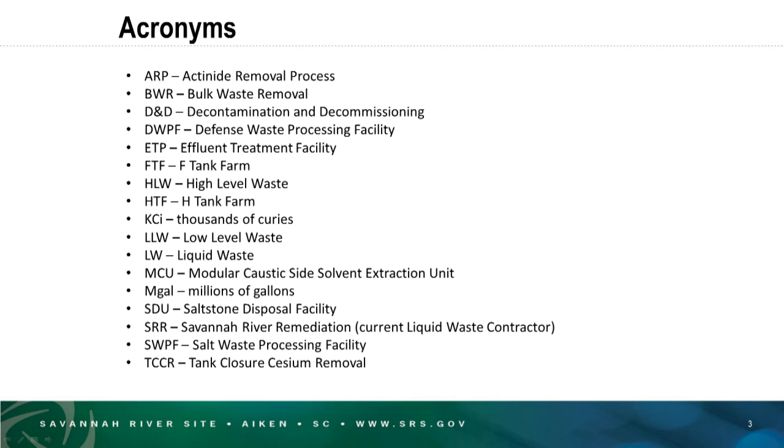So we are going to be presenting to you the topic that we promised you, the Waste Management Committee, the liquid waste system plan, but it also will help you with the tank closure discussion that you're going to get after this one, and also the status of liquid waste facilities that you will be getting throughout the year. The list of acronyms, because that's our favorite language here. So basically, we're going to be talking about the liquid waste overview, then the system planning process, the inputs to the system plan revision 21, and the results.

So let's go to the chicken or the egg. So why do we need a liquid waste program? Back in the 50s, the reactors on site were irradiating targets and fuels, and then the separations operations, which is the nuclear materials program, operated for many years. They produced a total of about 160 million gallons of waste. That's the waste that we call legacy waste nowadays, and that's the waste that we're storing right now in our storage tanks. Obviously, we do not have 160 million gallons of waste right now. We only have about 35 million gallons.

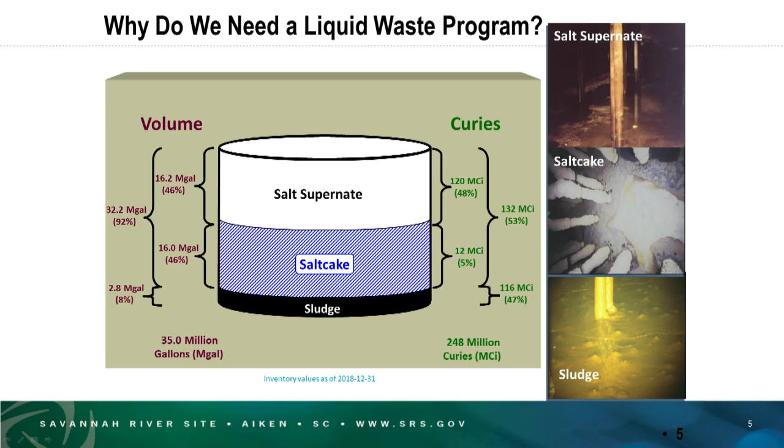How did that happen? Well, the Department of Energy, and back then whatever it was called, constructed storage tanks and realized that we just couldn't build that many tanks to store all that waste. So the waste got evaporated over the years and concentrated, and that's how we ended up with about 35 million. Oh, I did the wrong thing. Okay, so that's why we ended up with 35 million gallons.

Basically, when the canyons, H Canyon and F Canyon, were processing the targets and the fuels, they were extracting nuclear materials that are used for different things in the medical field, the space program, and defense. And that waste, when it was sent to the tank farms, was combined with sodium nitrite and sodium hydroxide, so it would become an alkaline waste, because it was produced from an acid process. And when that happened, what we ended up with is a salt waste and sludge waste.

Basically, the waste that was being produced by the canyons had a lot of metal oxides, like aluminum, iron, uranium, mercury, nickel, and noble metals. And most of those are insoluble. So that's how we end up with the sludge. And as you see, the sludge is pretty thick. Some people say it looks like peanut butter. I don't know why we always compare it to food, but it's like peanut butter.

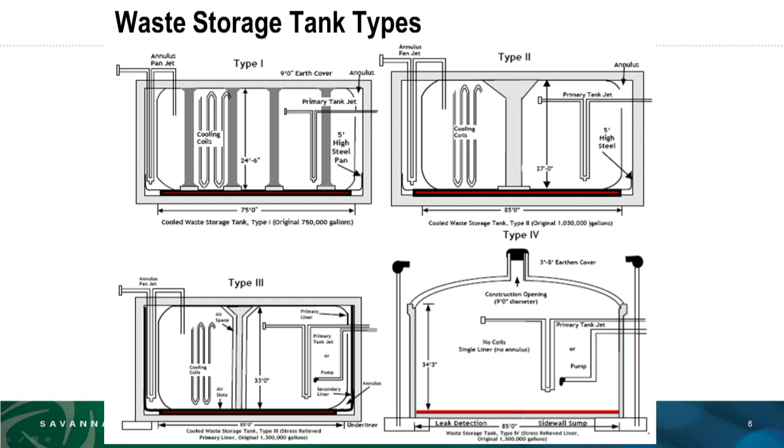The tanks on site were built at ground level, and then they put dirt all around them and built what we call hills, the east hill, the new hill. The dirt was built up around them for the shielding. And as you see, we built them since the 50s, and the new ones were finished in the 80s.

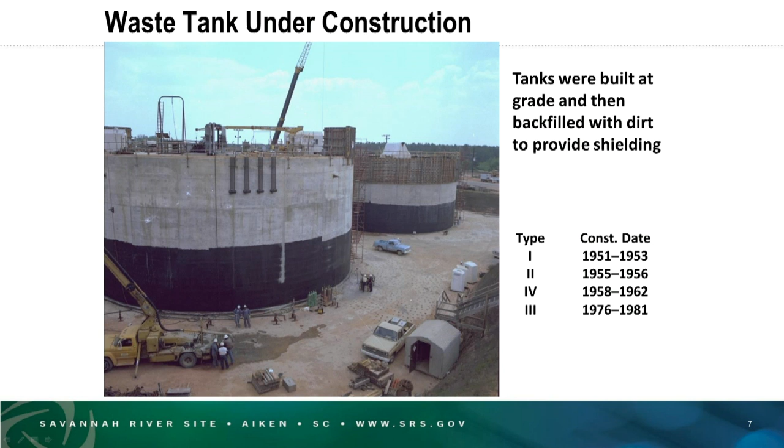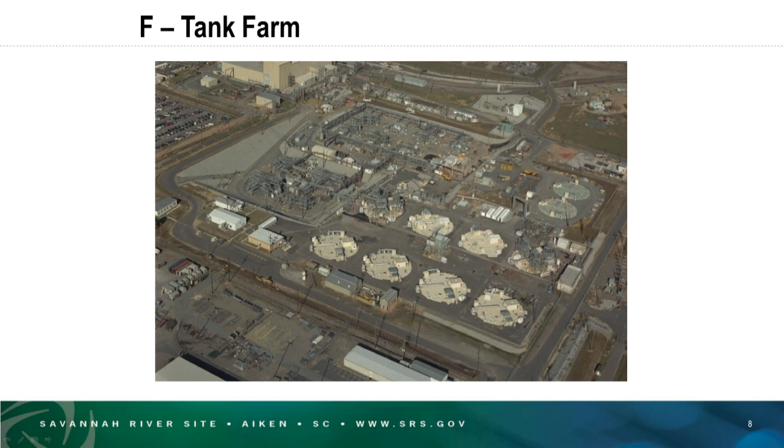F-tank farm, just to give you a glimpse of what we mean when we say a tank farm. This is F-tank farm. Basically we have a group of tanks in an area. You only see the tank tops in the tank farm. I have worked on every tank. Just to give you a perspective, when you came to the tour, I think you came only to the DWPF. Hopefully in the next tour you'll get to see some of this.

What we're talking about here is that we got two tank farms, F-tank farm and H-tank farm. And there's an inter-area line between them, 2.2 miles long, through which, by pumping, we send waste from one to the other. And the treatment and disposal facilities are around H-tank farm, really. F-tank farm right now we are using more for storage. H-tank farm is really where all the action happens, preparing feed, etc. for the facilities. You got SWPF over here and DWPF, Saltstone, ETP, Effluent Treatment Project.

And we got one evaporator in F-tank farm, 2 evaporators in H-tank farm. The one evaporator in F-tank farm, we're not operating it anymore. We have 2 in H-tank farm that are still operating, and you have heard updates on them every now and then. We got 22 tanks in F-tank farm, 29 in H-tank farm. 24 are older style tanks. 27 are new tanks.

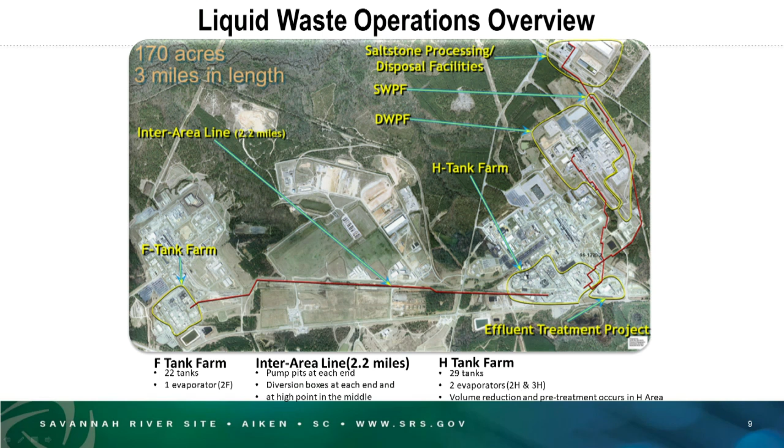So you might have seen this before. Just to give you an idea, we have received the waste, and we continue receiving a very small amount from H Canyon at this point. We have 43 tanks active, 8 tanks have already been operationally closed. Our salt waste right now goes through ARP/MCU, which will be ending soon.

SWPF coming up in the next year. And the tank closure cesium removal process, which is in demonstration at this point, and you'll get to hear about it after this talk. The highly radioactive component of the salt waste goes to the DWPF, Defense Waste Processing Facility, which is vitrified, stabilized, immobilized into canisters that are being temporarily stored on site until we can send them some safe place.

And then the rest of the volume, which is the grand majority of the volume, goes to Saltstone, where it's gonna be grouted and made a solid as a saltstone, and that's a permanent disposal into the Saltstone disposal units. When we remove all the waste, we proceed with tank closure as funding is available. Any questions so far? All right.

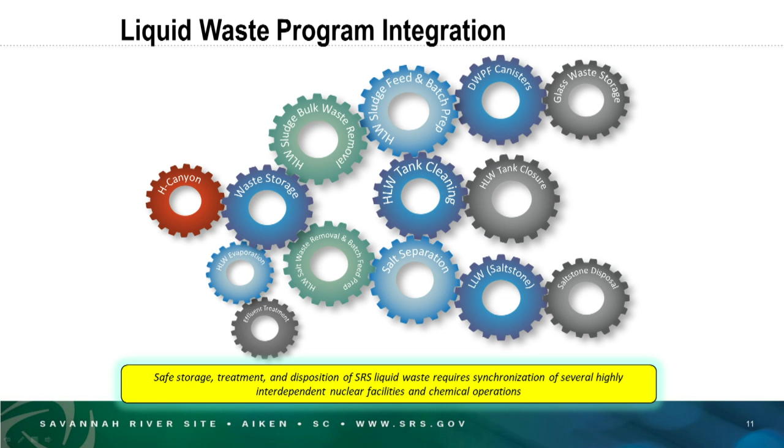Okay, let's see. Waste retrieval, just really quick: 35 million gallons, and 92% of it is salt. When we want to remove salt waste, you saw that salt cake is a little bit solidified, and then the supernate. For every gallon of salt waste, we need about 3 or more gallons of water to be able to dissolve it. So from one tank, more than 3 times is produced in terms of salt solution, and sometimes we say that we're unzipping the salt cake, because it's compact, and we're making it what it was to begin with.

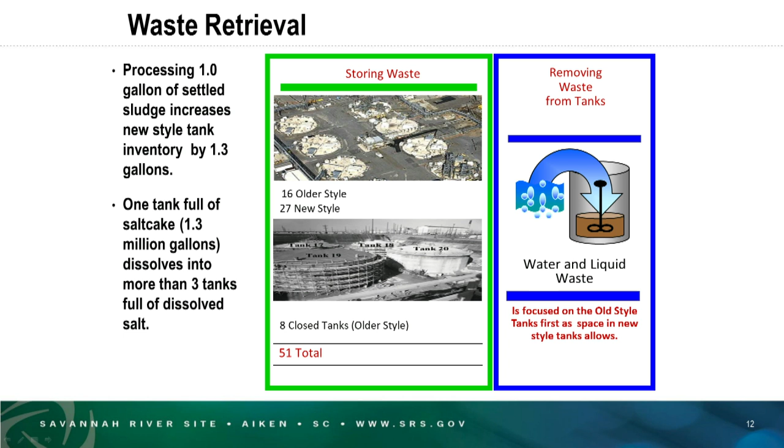And when we process sludge in DWPF, for every gallon of sludge that we want to process through, it becomes 1.3 gallons. So the waste that we prepare and send to DWPF comes back to the tank farms. So we are not reducing inventory in the tank farms until we actually process salt. I just wanted you guys to be aware, and that's why you're gonna see the budgets that we have.

Every tank that we have out there, we have to prepare it for waste removal, and then to be able to remove the waste for feed. And that means we have to install equipment. We have to make other services available, electricity, water, anything and everything that is necessary to operate the equipment, so we can actually mix the waste with the water to dissolve it, and also to remove it from the tanks through, of course, underground transfer lines.

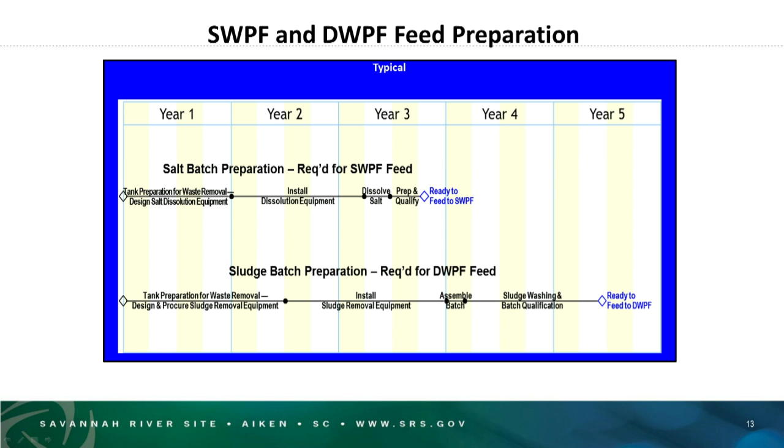And just so you have an idea, when we're preparing a tank for salt waste removal, it takes almost 3 years from the time we start preparing the tank until that waste is ready to be fed to SWPF or to ARP/MCU, for that matter. As far as sludge is concerned, it takes a lot longer. It takes about 4.5 years from the time we start preparing the tank until we are ready to feed the waste into DWPF.

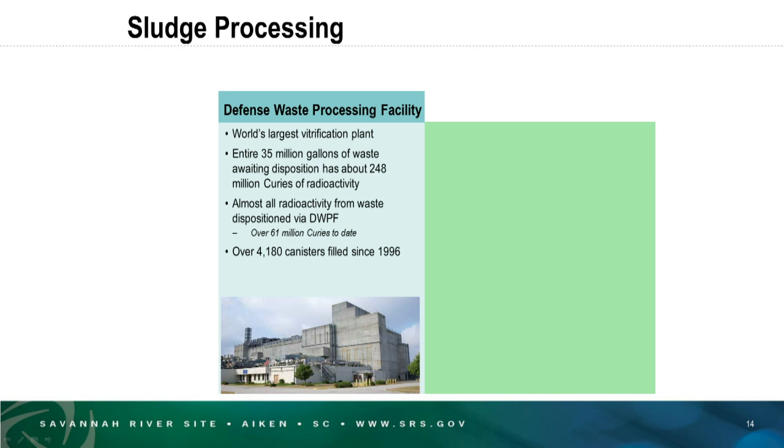For sludge processing, as I told you, we use the Defense Waste Processing Facility, and basically we introduce water again to the sludge so we can suspend the sludge. It's really difficult to remove the sludge in its present form. And it gets washed, and then the resulting waste is fed to DWPF in batches.

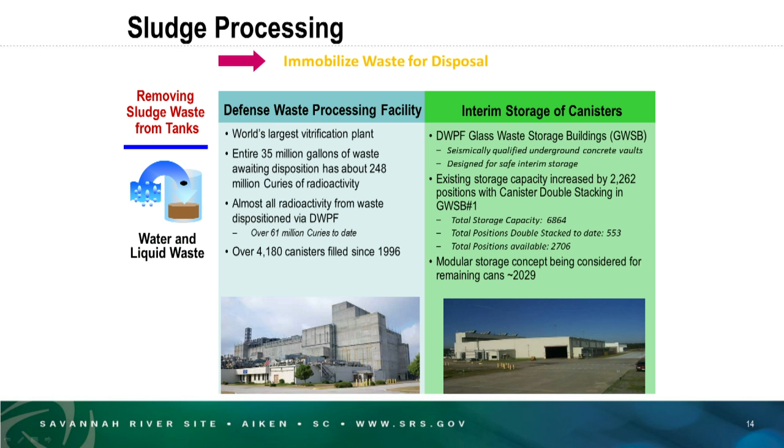And then from there, the canisters are sent to glass waste storage buildings. And I don't know if you have heard yet, we have to multiply the amount of storage we have. We have only 2 buildings. The first building now, we're double stacking the canisters.

We are doing a modification to each silo and to each space for canisters, so we can actually accommodate 2 canisters, and that has been incredibly beneficial to the program because that could be done very quickly, and now we have double the storage in that building. We have actually double stacked more than 500 canisters so far, and we won't need any additional storage until about 2029, 2030 at this point.

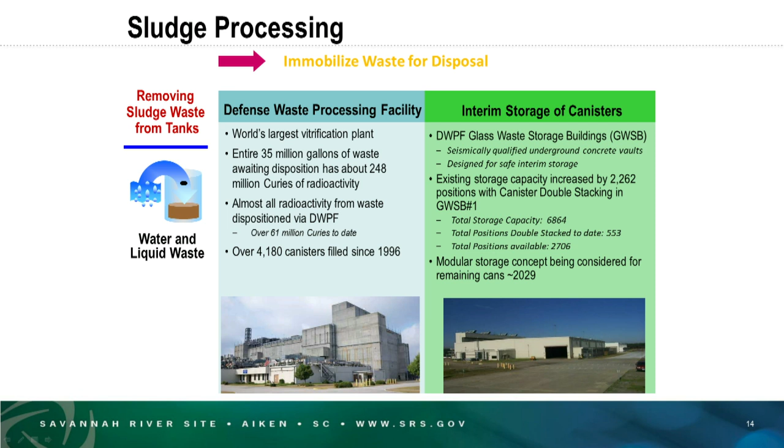Salt waste processing, as I told you, to get that waste removed, combine it with water, probably three or more times what the waste stored is. Then we send that to the salt processing facilities, whether it is ARP/MCU, SWPF, or TCCR at this point. It's a very small amount that goes to the DWPF, which is the highly radioactive portion of the waste, and then the rest of the volume goes to Saltstone to be combined.

So you know, when we go through the process of processing the salt, ARP/MCU or salt waste processing facility, we're removing the cesium and the strontium, the high activity components. And when we do that, we're increasing the volume by 26% of what it was originally. So when it goes to Saltstone, then it's going to be increased when it's combined with the cement, fly ash and slag. We're increasing that volume by 76%. That's why you see so many millions of gallons of grout versus the amount of gallons that actually got processed.

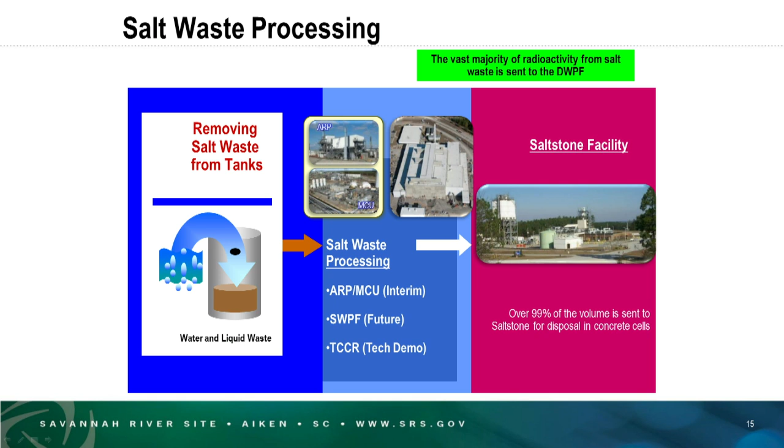Okay, let's see. I'm still looking here.

Interim salt processing, we're trying to remove the cesium and the strontium. We use contactors, centrifugal contactors. We actually borrowed this technology from the separations facilities and applied that technology to this process. And that's the process that we have in place right now.

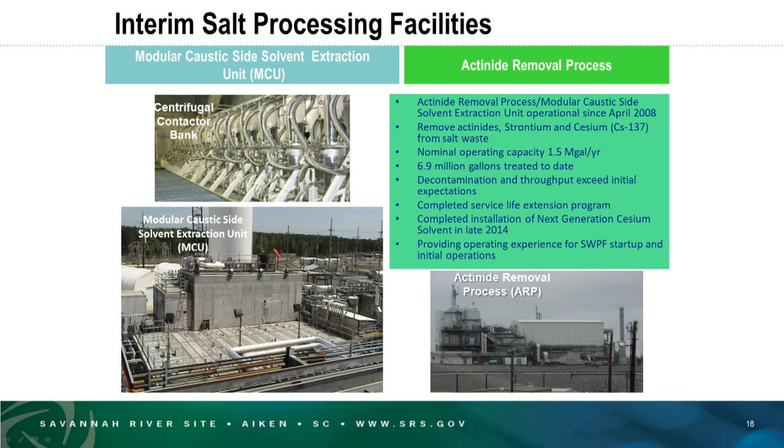The actinide removal process takes care of the actinides, removes the actinides, and this resulting salt solution goes into the MCU, Modular Caustic Side Solvent Extraction Unit, and through these contactors we separate the cesium and the strontium from that salt solution. The resulting salt solution goes to Saltstone. That salt solution is decontaminated at that point.

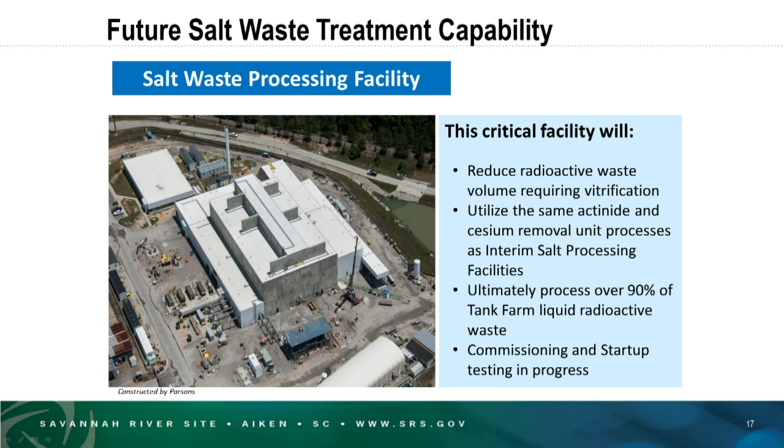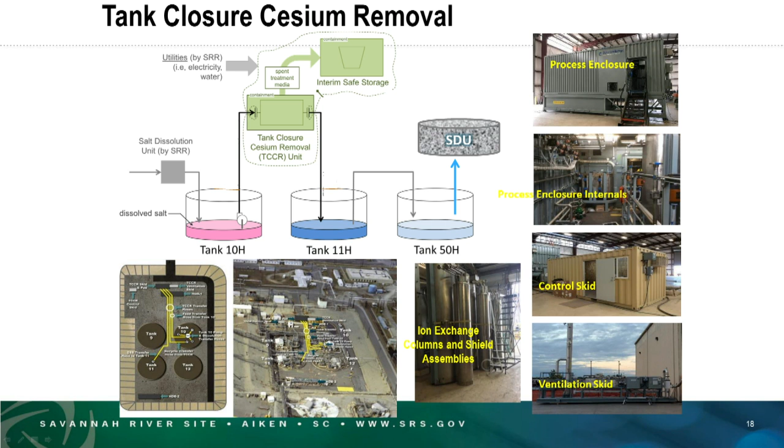Salt waste processing facility, same technology as ARP/MCU, 9 times. It should be able to process 9 times what ARP/MCU does. As far as gallons is concerned, could go up to 9 million gallons. Tank closure cesium removal, that's what Jeff and Penn will be talking to you about after this talk, so I'm not gonna say much about that right now.

Saltstone, we already spoke about that. We receive the decontaminated salt solution in that facility. It's the grand majority of the volume. It is a non-hazardous low-level waste, has a very, very small amount of radioactivity. And we combine the decontaminated salt solution with cement, fly ash, and slag, and that grout formulation, that waste, then goes into Saltstone disposal units.

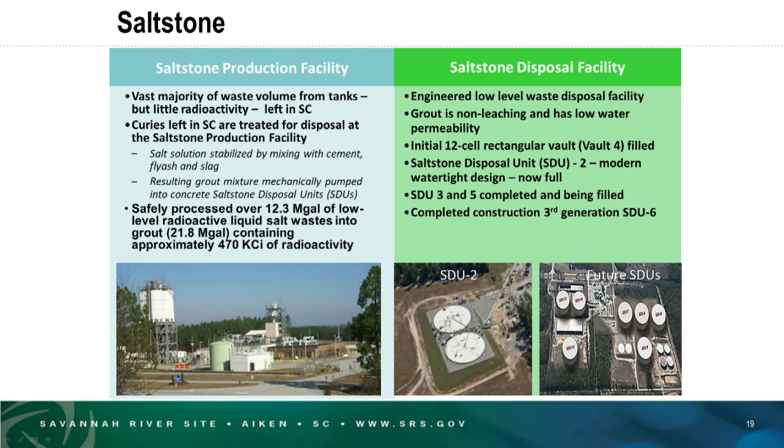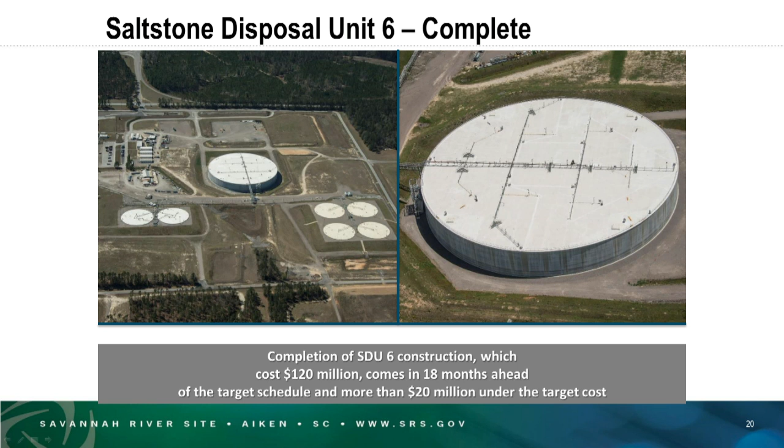And right now we are done with SDU6. It's already operational, and we are constructing SDU7. Actually, it was done under budget, and much earlier than scheduled. It was a big success.

So tank closure. You're probably gonna be hearing a lot about tank closure in the next several years. But just so you have an idea where we are right now, I am only mentioning here the older style tanks, so you have an idea what's going on. The ones that are still just working as storage tanks are the ones that you see up here.

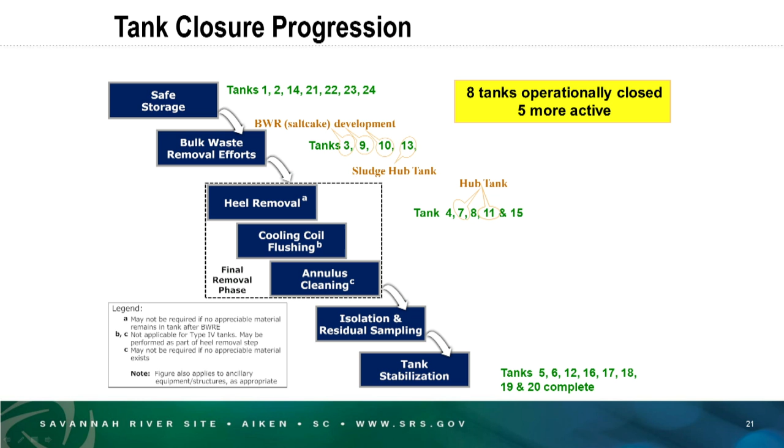We have these 4 that are undergoing bulk waste removal at this point. The ones that are in the process of getting ready for closure are 4, 7, 8, 11, and 15. And we have already closed 8. So we're getting there. Okay, so any questions on liquid waste overview? I tried to brush over, but I just wanted you to have a better idea before we talk about system planning. No questions? All right, let's go.

So the system plan, we started doing this many years ago, when we realized that because of the integration of the overall system, back when we didn't have salt processing yet, we figured that we were going to fill the tanks quickly. We were doing that very quickly, and we were going to run out of space to do anything. So we started developing a strategy on how we were going to go about doing our operations and maintaining space in the tank farms. Back then we were saying we were going to waterlog and salt bound the tank farms. And good news, we haven't done that yet, but we were very close.

So it takes a lot of information, a lot of plans to put a system plan together. And so we start with obviously what is it that we want to accomplish. And also we take very much into account what our agreements and discussions with our state regulating agencies have been. And of course the Environmental Protection Agency.

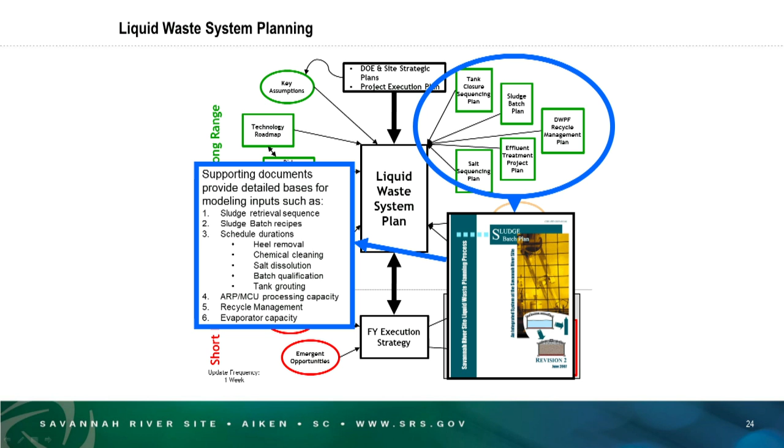Then as far as the system plan itself, we need lots of things to be prepared so we can have a doable system plan and operational strategy. SRR, in this case the contractor, prepares batch plans for sludge, for salt, and the plan for the evaporators. All those things are used when the system plan is written.

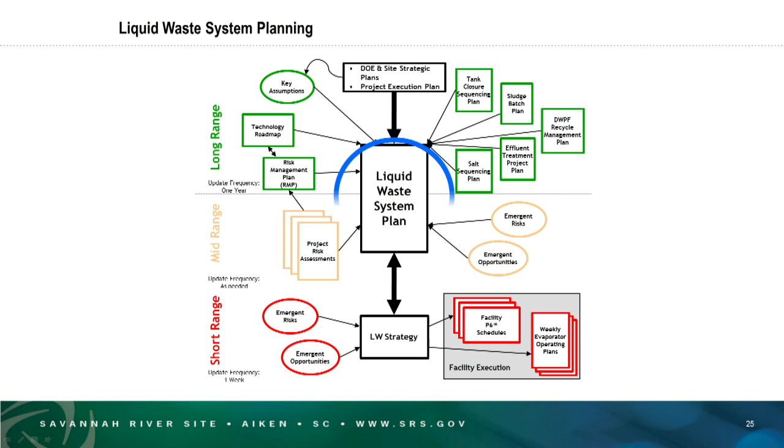So at that point, the contractor produces the liquid waste system plan, which is basically the strategy on how we are going to go from now until the end of the life cycle. What are the major activities that need to be done to accomplish whatever goals we have established for the system at that point. And you are going to be able to find the document on the website for the Citizens Advisory Board.

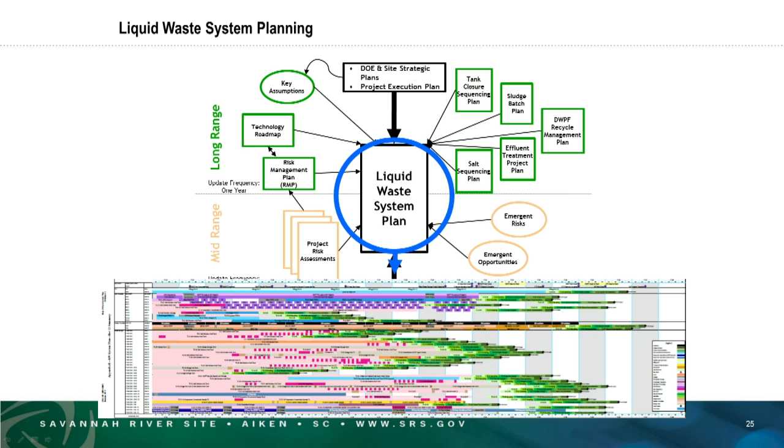So at this point we're producing another system plan, because the last one was written back in 2016, and the situation was pretty different. With the funding outlook, we thought that we were going to have a liquid waste contract already established after revision 20. The circumstances were quite different, and we thought that the next liquid waste system plan would be issued after the new contract was in place, and the new contractor would develop their baseline and a new system plan with the strategy that would include their winning plan.

But that has not happened, so we figured that we definitely needed to move forward with the system plan so we could actually make progress. It's one of those things: you get on a train, you've got to know where you're going. If not, who knows where you're going to end up. So we definitely need another system plan, and we said we'll just adjust when the new contractor is in place and figure out if anything needs to change, hopefully for the better. Otherwise, we are going to continue the course with what we know, with the best ideas we could come up with, and have the system plan put together.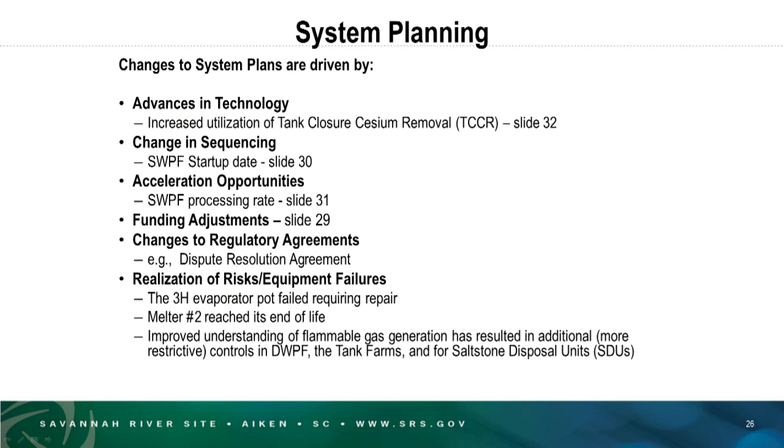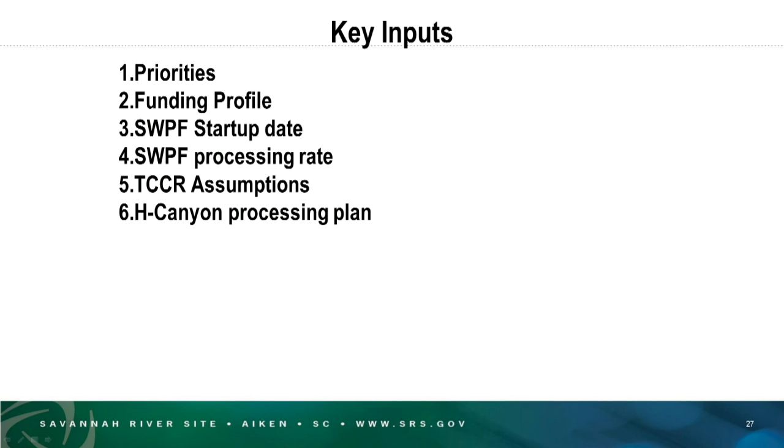Okay. Key inputs: the priorities that we reestablished, because the priorities for System Plan Rev 20 were a little bit different. Funding profile, the SWPF startup and processing, TCCR assumptions, canyon processing plan, all that is needed as an input.

Priorities for Revision 21. Well, now we're talking, how are we going to actually complete this mission? So in System Plan Rev 21, we say what's the best way we can actually complete this mission and do it the fastest possible. So besides obviously continuing with the safe storage of the waste, we're saying, okay, so how do we complete the system operational closure now?

And we said, let's try to get F-Tank Farm out of the way first. And then, of course, we have to respect the agreement in terms of processing rates, etc., which is very helpful because it helps with acceleration. And then we wanted to make sure that we would take care of those tanks because they are very close to the water table or in the water table. We wanted to take care of those as soon as possible.

And with the intent of closing F-Tank Farm as soon as possible, we wanted to see, let's put some effort into getting the services in the tank farm taken care of and closed.

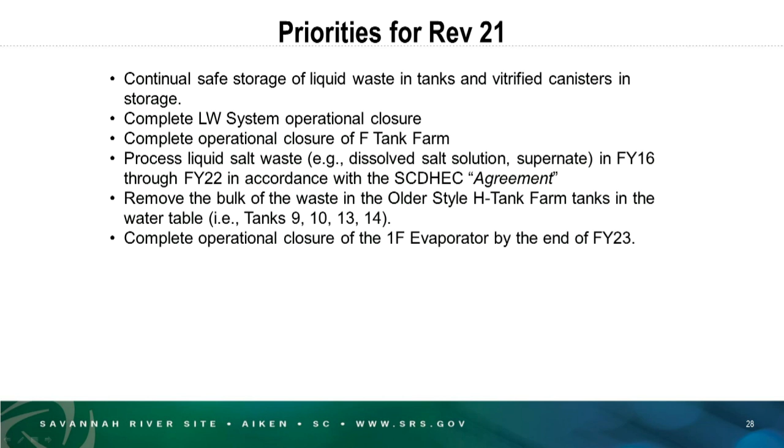Funding: at this point, what we said, all right, we knew the FY19 budget. From then on, we told the contractor, just tell me what it takes to get this thing done. The sooner, the cheaper it's gonna get. So let's just find out exactly what needs to get done.

SWPF, just for planning purposes. It doesn't mean that SWPF is gonna start in March. This is just for planning purposes. We just wanted to introduce a little bit of conservatism. So we would say the day after it got signed is no good anymore. So we just added a little bit of conservatism to the plan. And we said hot commissioning starts in March. The first year of operation starts in May.

And the first 12 months of SWPF, we're going to feed them 6 million gallons. They're going to process 6 million gallons. And we are assuming that the next generation solvent will become operational in SWPF sometime before the beginning of the second year of operations. And then at that point, they're going to start processing 9 million gallons.

This is really important because it means that we have to be able to feed them that much. That's a lot of work for the rest of the system. And we're also assuming that ARP/MCU will operate until 5 months prior to the SWPF hot commissioning date.

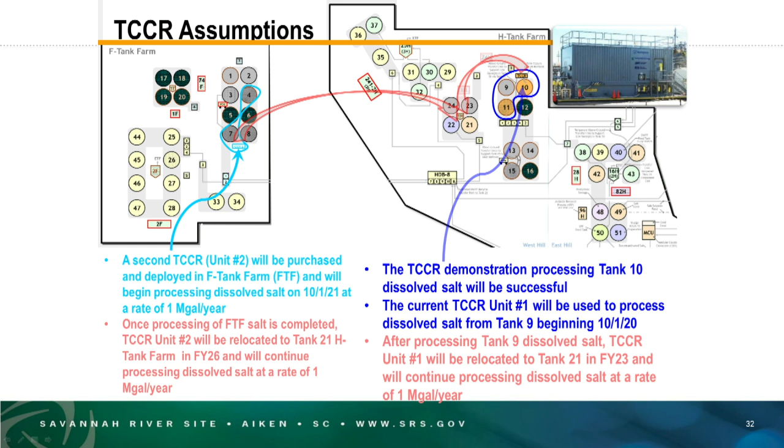Okay. Evaporators and DWPF recycle. I told you about the evaporators at the beginning of the presentation, and they continue to be a very important component in our system because when we process in DWPF, I told you about the sludge producing more liquid than what we're sending them. So they send about 2 million gallons of liquid back to the tank farms every year. So we said, oh my gosh, we need to continue evaporating the waste, and we use the 2H evaporator for that.

Let's talk about the DWPF recycle first. SRR is proposing to divert the recycle by 2023. They're evaluating alternatives, and it looks pretty good about sending that waste to the effluent treatment facility after some treatment and not having to introduce it into the tank farm anymore. So that really lowers the use for an evaporator.

And then the 2H evaporator takes care of that recycle. The 3H evaporator takes care of washing the sludge, the water that comes back from washing the sludge to be fed to DWPF. So by getting the recycle diverted, the 2H evaporator could start working on the sludge batching, sludge preparation, and then the 3H can be retired. The strategy says that the 3H evaporator is going to shut down in 2026. The 2H evaporator is going to be later, 2030.

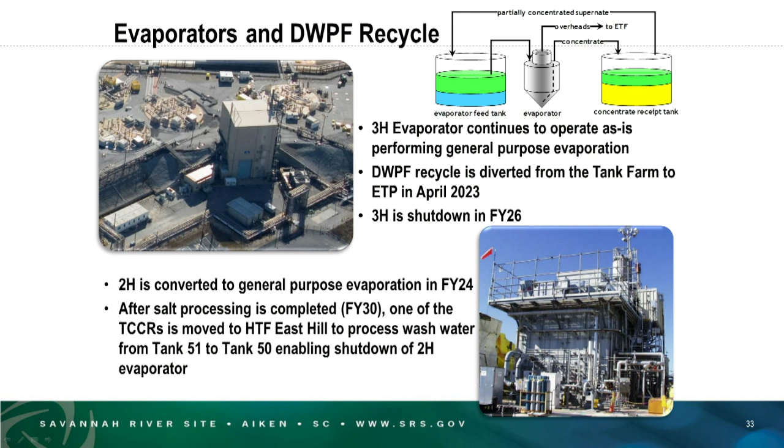Other inputs: H Canyon continues sending us a very small amount. We planned for 300,000 gallons, but they never make that much. We are saying we can accept until FY30. Tank 48, this is an oddball. We have some waste in there that we need to take care of, and we are going to hopefully start working on it in the next couple of years and actually have it closing in the early 30s. DWPF, we continue to synchronize the canister production with salt processing.

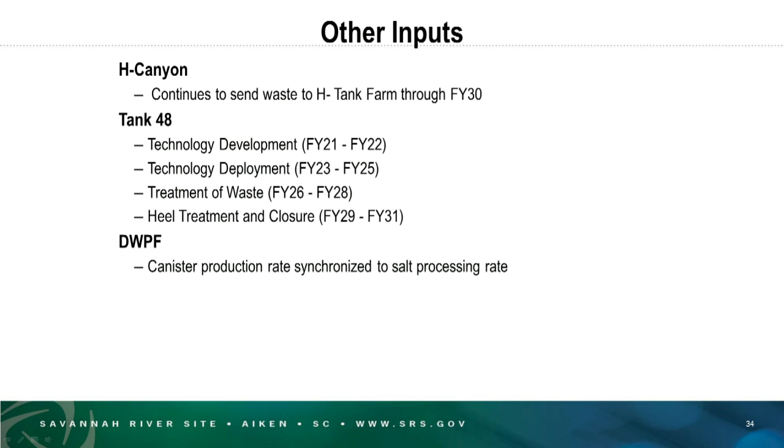Results. Okay, so we're very excited about this. If we go the way we say that we can, we will empty F-Tank Farm. We'll remove all the waste and send it for processing by December of 2030. And we can actually cut the inter-area line. That also helps in regulatory space. So basically F-Tank Farm would become a tank closure kind of site where we would be doing grouting services at that point.

SWPF would complete operations by December of 2030. F-Tank Farm, we can close it by the middle of 2033. Then the removal of all the waste from H-Tank Farm would be completed in 2034, and that's also when DWPF ends. When you look at all our tanks that are left to be dealt with and closed, by 2035 we have taken care of the great majority of the tanks. 44 out of the 51 are closed, and then we have about 7 tanks to take care of as far as tank closure is concerned, and they will be done by 2037.

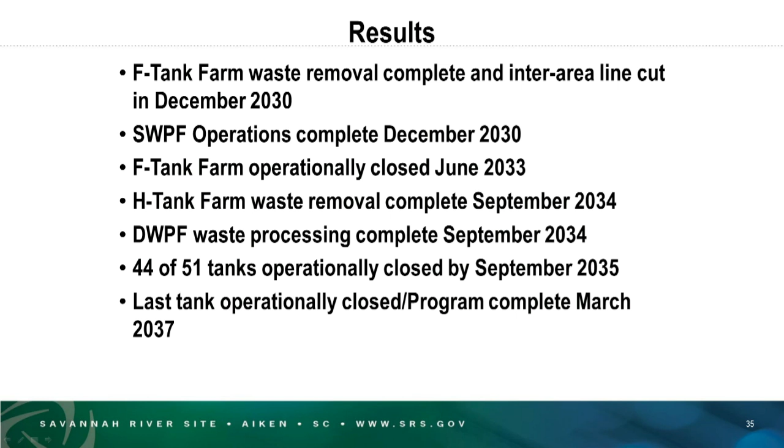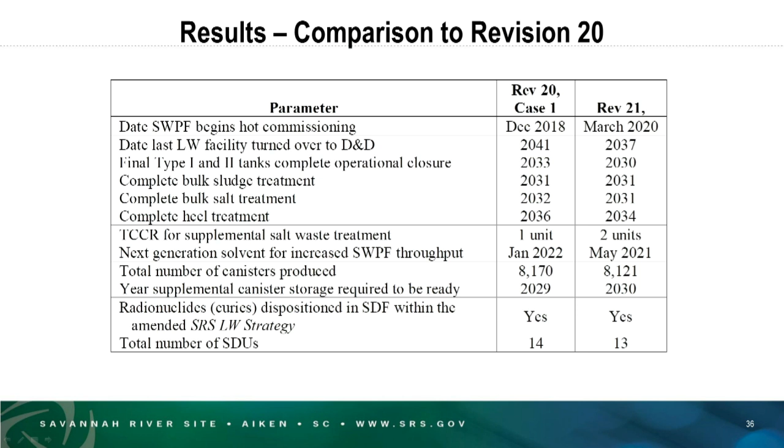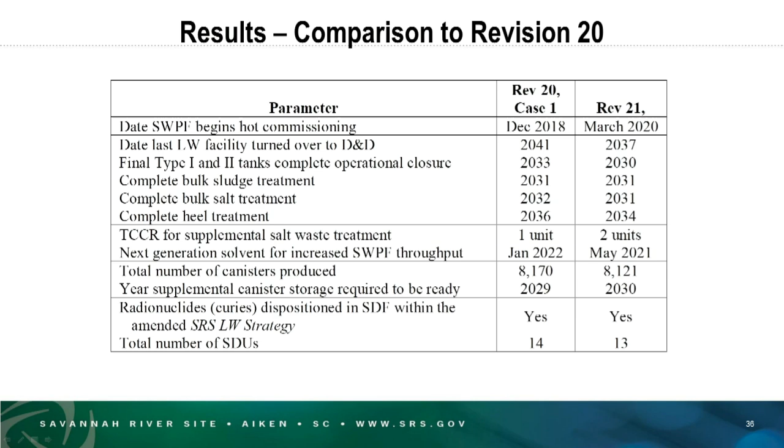But basically, all operations in liquid waste will be done by 2034. So definitely that beats 2041, which is what revision 20 was saying. These are just dates to compare with revision 20, but basically we're talking a few years of acceleration. When you look at actually processing waste, complete salt treatment is a year difference. DWPF, the sludge treatment, this is supposed to be 2034, I apologize for that. But actually getting everything ready and turned over to D&D is quite a bit earlier, 4 years earlier.

SDUs, we're talking about 14 SDUs in revision 20, now we're talking about 13, but SDU 13 is probably going to be very, very small, probably like 3 million gallons or so.

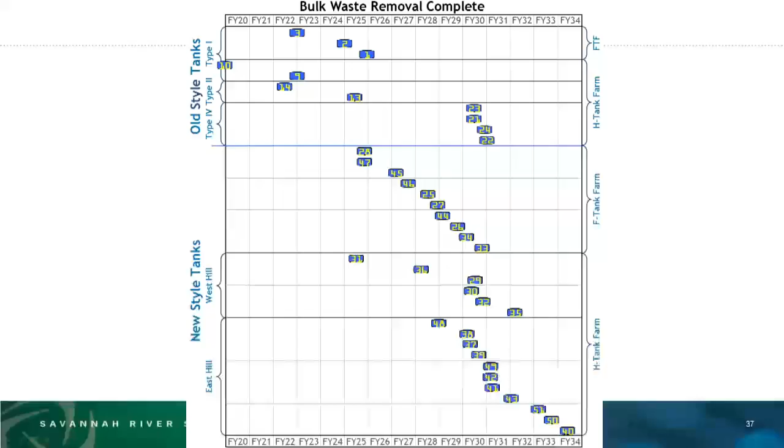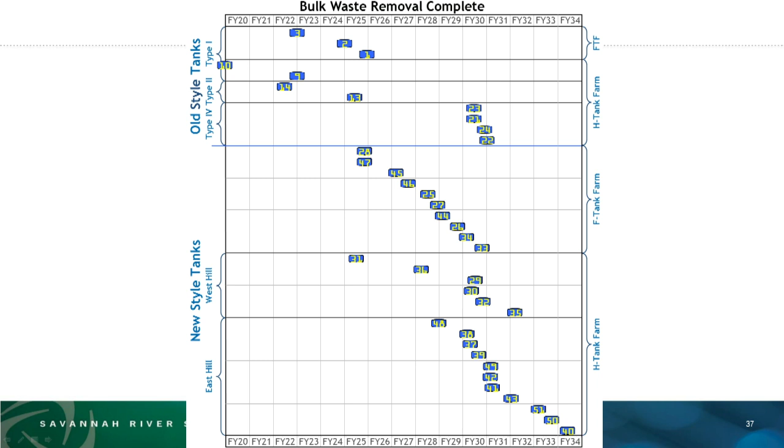I just wanted to show you what bulk waste removal looks like. Obviously we're going to continue to empty tanks as we go along. But as you see now, we're talking about the compliant tanks, so we're going to get into that very quickly. In the next couple, 3 years, you're going to start seeing us going into the compliant tanks, the new tanks, and we're going to be done with the older style tanks. This 4 is on purpose because they're very good tanks, don't have cooling coils, and we use them to help us with the processing of the waste.

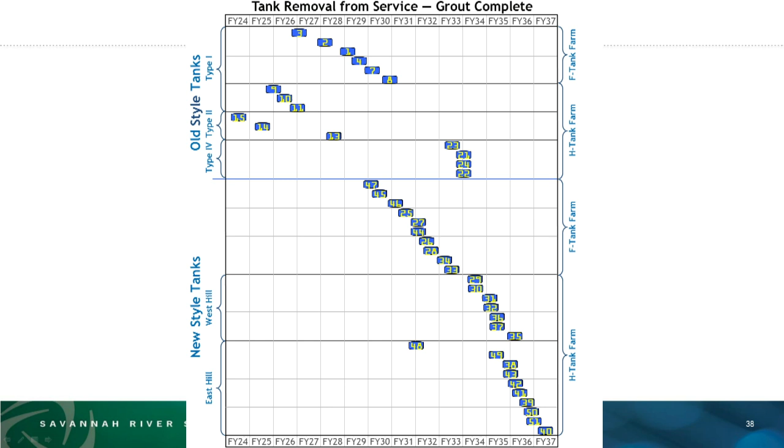All right, so that's what I have in slides for you. Any questions? All right, who's going to be first? Jim. Thank you for the presentation.

One of the things that has been discussed a little bit is operating H-Canyon at full capacity to reduce the inventory of aluminum-clad fuel rods. Does that impact the ability of the salt waste processing activity to continue to stay on schedule and process that volume, or does the additional volume from the H-Canyon pose an issue?

At this point, it doesn't pose an issue yet. We're going to continue with our strategy. H-Canyon, the Nuclear Materials Program, they are looking at their mission and how they can best use the capability that we have at this point. And beyond the schedule that we have laid out here, they're looking at what they could do to use our facilities the way we have it set up, or what's going to be the alternative. So at this point, there are no changes to what I'm showing you. Okay, thank you. You're welcome.

Doug. Doug Howard, CAB. Sonny, thank you very much for your presentation. Your presentations have gotten easier and easier for me to understand, so I certainly appreciate it. Can you go to slide 22? Is that slide 22? No. There you go. Is that it? Yes, 22.

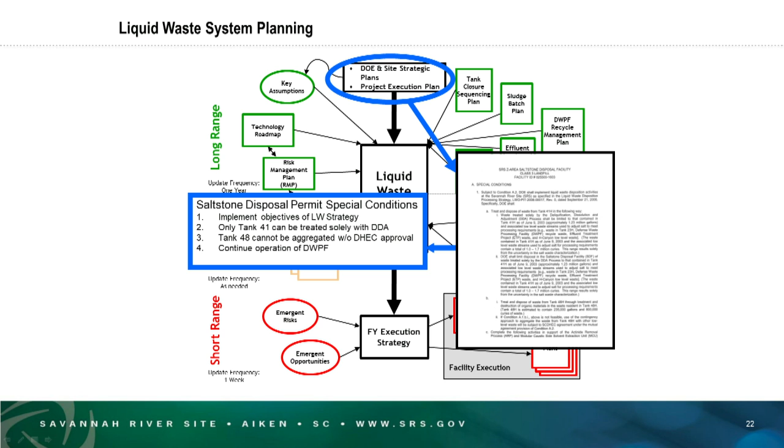Okay. You have only tank 41 can be treated solely with DDA. Did you explain that, or what is that all about? Yes, that's back before we had ARP-MCU online, actually before it got designed and constructed. As I told you, we were at a point where we were really running out of space in the tank farms. And as we were working our way into getting a salt processing technology established and a facility that could actually process the waste in production capacity, we had that discussion with the state, and we told them that we had an idea.

We wanted to open space in the tank farm so we could actually start salt processing, because to process salt through a facility, we needed to be able to prepare the batch, and there was no significant space available in one tank where we could prepare batches for that process. ARP-MCU started up in 2008, but we needed time to do things. So we started discussing this idea of, it's escaping me the three words, hold on. Sonny, deliquification, right? Deliquification, dissolution, and adjustment. Yes, I'm sorry about that.

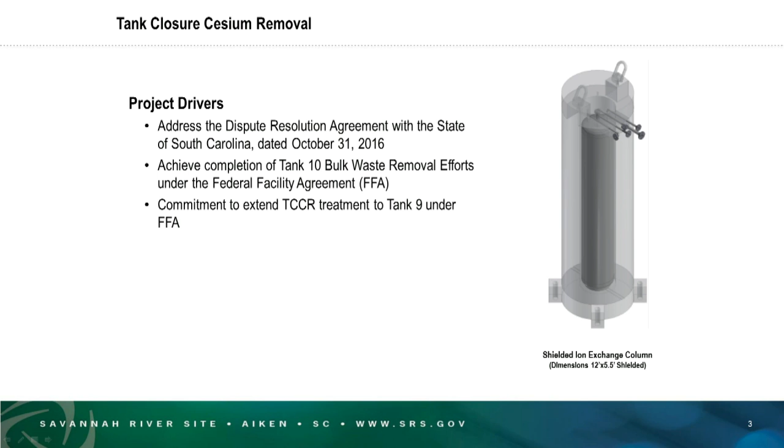Since that time, just recently, I heard in the last presentation about the suspension agreement. Well, that was done earlier this year. From that suspension agreement, we also now have a commitment that we would extend the TCCR process to treat Tank 9. All right.

The TCCR process has several key benefits. One, as I just stated, it supplements our salt processing, and it allows us to accelerate closure of our non-compliant tanks. It provides a risk reduction in times of Salt Waste Processing Facility outages, because the TCCR process is not dependent on any of our other facilities to be operational. It's only dependent on some lag storage space that we have in our Tank 11. It demonstrates an at-tank treatment technology, which has always been something that the department has strived to do. It's modular in nature, and that modularity allows it to adapt to varying feed streams.

Sonny mentioned that by 2023, I think it is, we want to find an alternative process to deal with the DWPF recycle, and it is possible that the TCCR process could do that. If feasible, we do plan on building the second TCCR unit in that tank farm. And then I just wanted to mention that it's also applicable to some of our other sites within the complex, and it just so happens that Hanford has started pursuing a project, they call it tank side cesium removal, that mimics this one here, to start treating their waste to prepare it for their feed for their low activity waste vitrification.

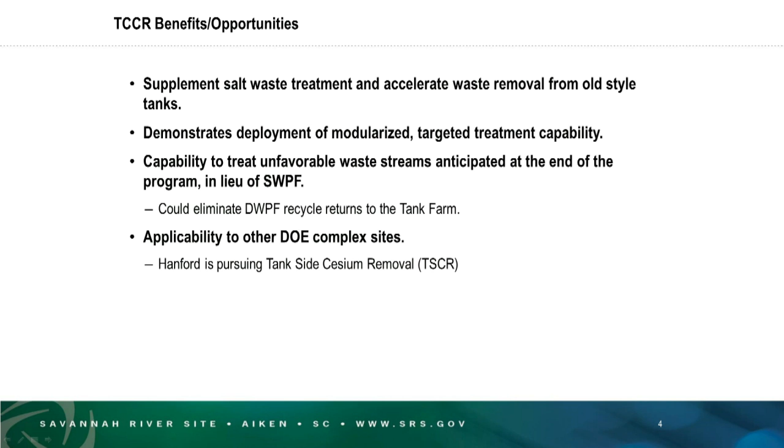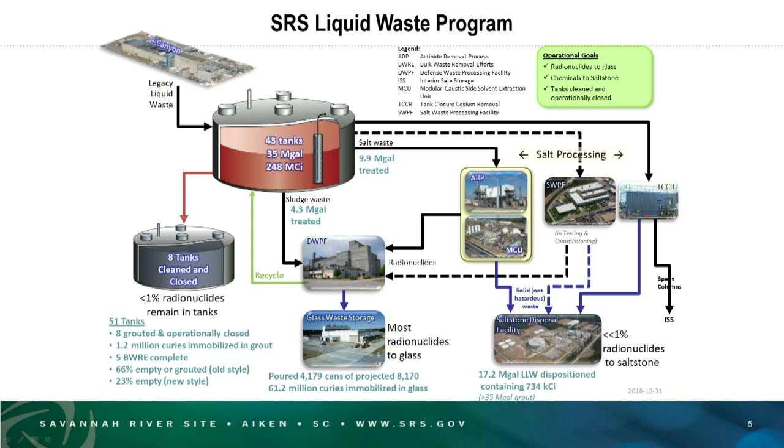Sonny hit this slide in her presentation pretty hard, so I just want to point out a couple things. So TCCR over here, as I said, is not dependent at all on any of these other facilities to run. You can notice that you don't see any lines going to SWPF or over to DWPF. The only one you do see is Saltstone. That's because ultimately the material that comes out of TCCR will end up in Saltstone.

All right. Conceptually, this is how it works. We have a bunch of salt in tank 10. We add water to that tank to dissolve the salt. Recirculate that water until we get to a point that we feel it's got the right characteristics to send through

TCCR. We'll deploy a small sample vial of our resin that we use into the tank to perform an equilibrium test. Once those test results come back and they're deemed good, we'll send the material to the TCCR. Inside there, it goes through a pre-filter, and that pre-filter is designed to take out any solids that we happen to carry over and send to it.

The filtered material then goes through the ion exchange columns, and what we've been doing is running 2 columns in series. We call it a lead column and a lag column. It's a big steel column that's filled with a small bead. It's a resin, and as the material goes down through that resin slowly, the resin itself has a strong affinity for the cesium that's in the waste, and the cesium then adsorbs to that resin.

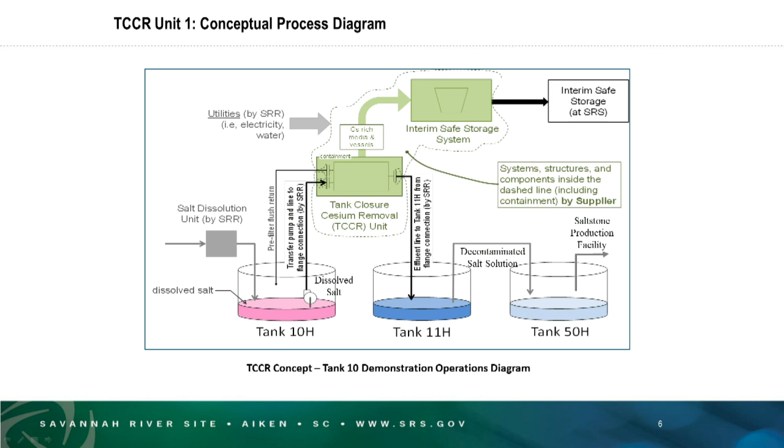Don't know how many of you are familiar with H Tank Farm now. I know there's a lot of new faces on the CAB, but this is the location of where tank closure cesium removal is. There's 4 tanks down here. There are tanks 9, 10, 11, and 12. And these are the first 4 tanks that were built in H Tank Farm. They're type 1 tanks. Sonny mentioned the different types. So they're non-compliant tanks. They do not have full secondary containment. They were built in the 1950s to support operations at H Canyon.

Unfortunately, back in that time, we didn't really have the pumping technology available in order to send the material from H Canyon all the way over to these tanks. So we had to be a little clever in designing. We had to utilize gravity to make sure that we could send the material from the canyon over. So these 4 tanks are built actually down below grade, okay, and happen to be in the water table. So that's another reason why these tanks are very good candidates for tank closure cesium removal. It's because we want to get the material out of them as quick as we can, and close that risk that we have with those tanks.

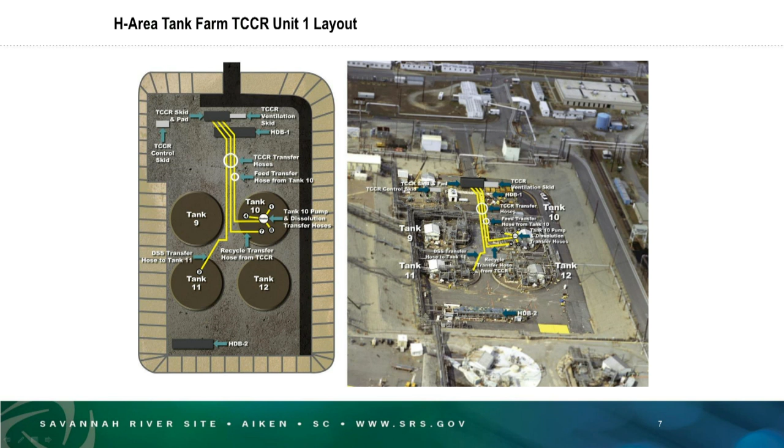Some pictures for you to let you know what it actually looks like. Some of the CAB members, I know the older ones, were out there last year and had a tour of it. On the right-hand side, this is the process unit. I just want to point out, there's a door here. This is an airlock on the right-hand side. There is a wall separating this airlock from the rest of the unit. It's shielded quite heavily, so that a person could actually enter this airlock while we're processing. It has a lot of our programmable logic controllers, so if there was an issue with one of those, they could go in there to fix it.

All the columns, all the piping, the filters, and everything else is on this side of that shielded wall. Over here, this is our ventilation skid. I just want to point out that this ventilation skid does not provide any process vessel ventilation at all. It is simply there in case we ever had a spill inside of our processing unit. It's there for contamination control in that event.

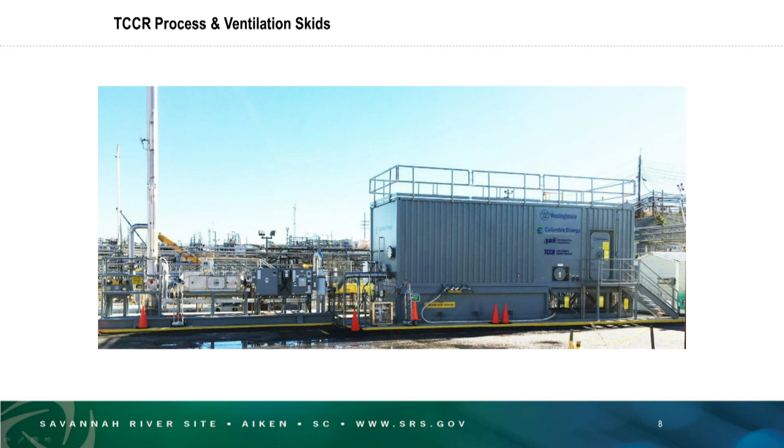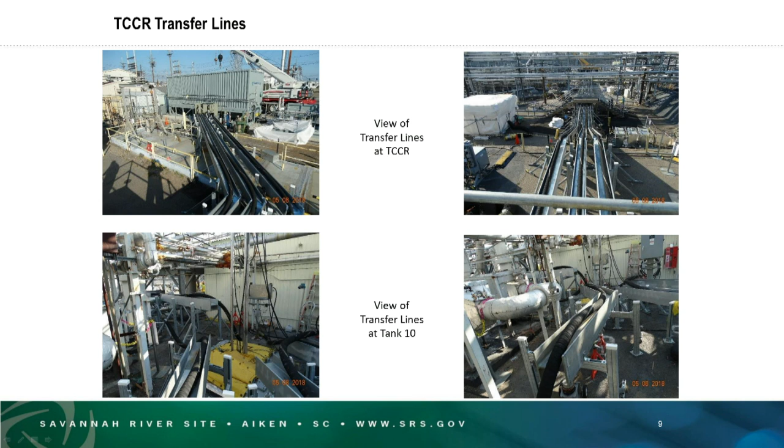If you went out there today, it doesn't look exactly like this. You wouldn't be able to see, if you look over here on this picture, the two lines on the right, because this is the line that comes from tank 10 and feeds the TCCR. This middle one is our recycle line, so it sends material back. For example, when we clean our filters, backflush our filters, that material needs to get sent back to tank 10. And because that material is quite hot, these two lines have shielding in the form of lead blankets over them, so you can't actually see it.

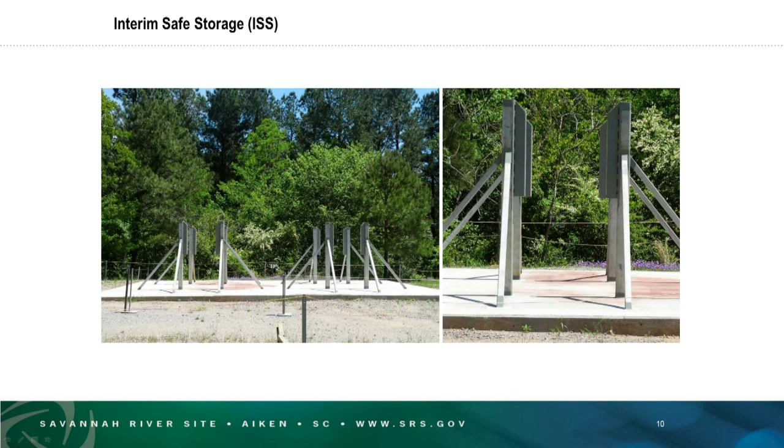As far as our demonstration project goes, we had a few things we wanted to accomplish with it. We expected that the salt in tank 10 would make approximately 600 to 750,000 gallons of salt solution with a curie content of approximately 0.16 curies per gallon. We were going to load each column with approximately 25,000 curies each, and the idea was to show that we could achieve a decontamination factor of over 1,000.

In addition to that, obviously during this demonstration, we're going to gather as much data as we can, and we wanted to see just how well those pre-filters were working. We want to be able to change our processing rates throughout the demonstration, and along with doing our equilibrium test, we wanted to come up with this optimum feed control strategy. And then we also wanted to measure real rad rates, right? So we could figure out just how effective the TCCR unit is.

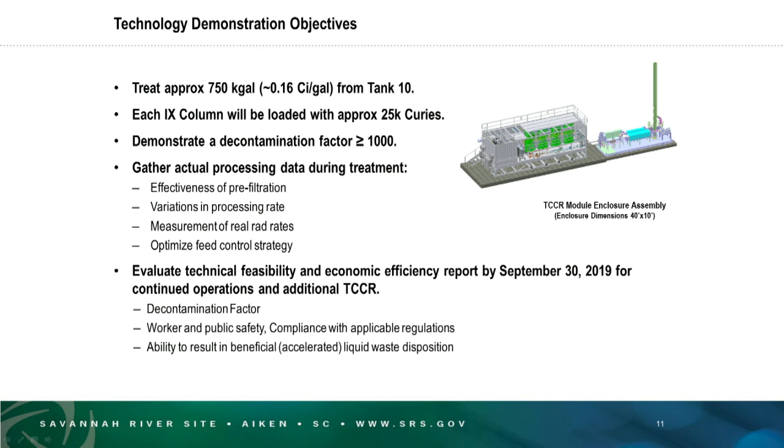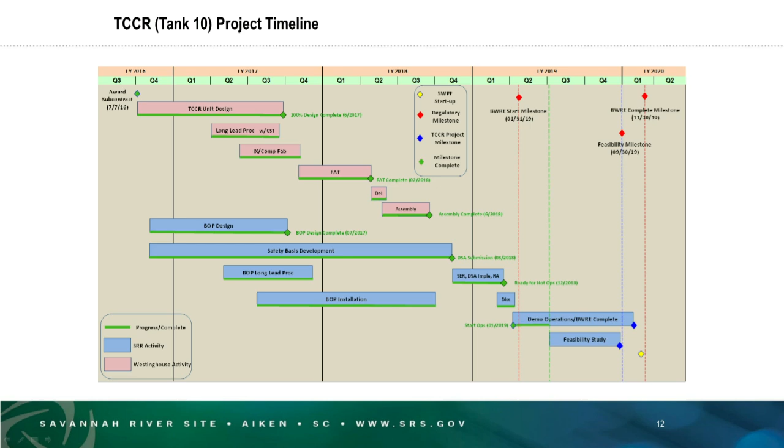At the end of all this, we're to deliver a feasibility study. This is a milestone out of that dispute resolution agreement I mentioned earlier, which we're on target to fulfill by the end of September. I think you can probably read this on your paper slides, maybe not so much up here, but this is our actual project timeline. So this project started in, I think it was July 2016 that they let the contract to the subcontractor to design and fabricate the TCCR unit, and it was a little over 2 years from that point until we had that FFA milestone.

So I just wanted to point out a couple things. Right here, this bar, this is our factory acceptance testing. You look at that bar, it's 6 months long. You would never expect it to be that long. Actually, at the most, probably maybe 2 months to go ahead and test this out. However, I just wanted to point out, because during our factory acceptance testing, we had an issue.

I think the subcontractor was really focused too much on our ion exchange columns and kind of overlooked the pre-filters. And they designed the system to be a one-time pass-through. So in the field, this is fine. But in factory acceptance testing, you don't have that luxury. You don't have an unlimited supply of water or simulant you want to send through and then dispose of. So they actually have to recycle that material back.

In doing so, what I believe is they did not flush the columns enough to remove all the small little fines that are in there. And so when they started up our testing, material went through, it picked up a lot of those fines, went into the recycle tank, got sent back into the front end, and basically blinded our filters, completely plugged them. And it took us 4 months to recover those filters back to the original state.

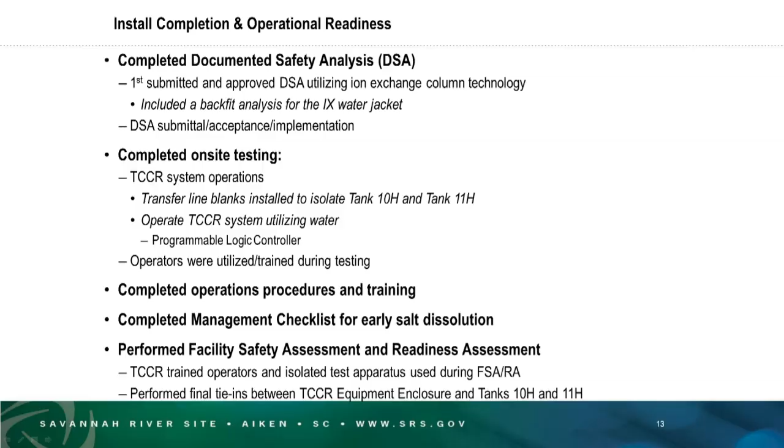All right, so the CST and ion exchange in this safety basis, it took quite a bit of engineering analysis. It took 15 specific admin controls to put in place. Most of those were involved around the chemistry within the tank. We did include a backfit analysis for a water jacket around the column. Okay, what does that mean? We have a column. You've seen the column. It was in one of the earlier slides. It has lead shielding around it. It is unique to each of the columns, and there's an annular space between the column and the shield, less than a couple inches.

We made the decision to fill that with water, and by doing that, we were able to convect heat quicker outside of the column. The CST resin, the ion exchange process, creates heat. We need to get the heat out of the column. And so by doing that, we were able to conduct heat quicker outside of the column. So we did backfit the water jacket into the ion exchange process, further complicating the DSA.

I do want to point out the DSA submittal. When it was introduced, DOE was working very closely with us, both our project group and engineering group, on most all of the questions and comments for submittal, and that DSA flew right through with a quick approval. And every time I get a chance to congratulate and thank our DOE partners, I want to do that. And so again, it was very quick and all went well.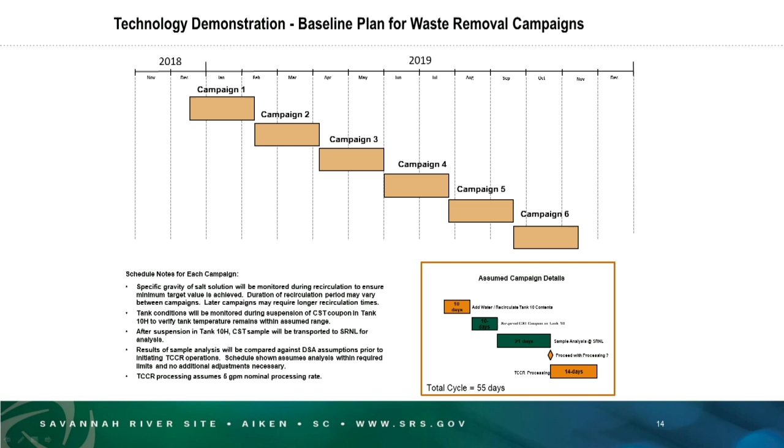Excuse me, you never use the word drop in a nuclear facility. You lower it in the tank. I've been told that a number of times. So you lower it into the tank. You let it sit in the tank for 10 days. It reaches equilibrium in the tank. And then after that 10 days, you withdraw, remove, you don't yank or pull, right? You withdraw, you remove it from the tank.

You take the CST coupon up to SRNL, and you get to this 21-day analysis period. What does SRNL do with it? They analyze it for cesium and all the other constituents to match the DSA. And at the end of that period, there's a go, no go. If you're within the constraints of the DSA, you're good to go. You start processing. If you're not, you got to repeat this process. And then you process for 14 days. So each one of these campaigns is about 55 days long. That was the plan moving in.

So what happened on the first campaign? As I said earlier, we took an early start on the campaign by breaking out the salt dissolution and started it early, which was on 11/8. We added 150,000 gallons of water. We circulated for 10 days. We measured density readings, and we deployed the CST samples, the tea bags, into the tank. And we came back and said, okay, what do we have after 10 days?

Well, the analysis indicated that we had very low sodium concentration. And low sodium concentration means your sodium's too low. Your sodium needs to be at a certain level. 3.2 molar is the minimum to satisfy the DSA. That is how we control the cesium loading onto the CST. You control it by making sure you have enough sodium in place. Sodium and cesium compete for the sites on the CST. So that is how we know how much CST we're putting into the tanks.

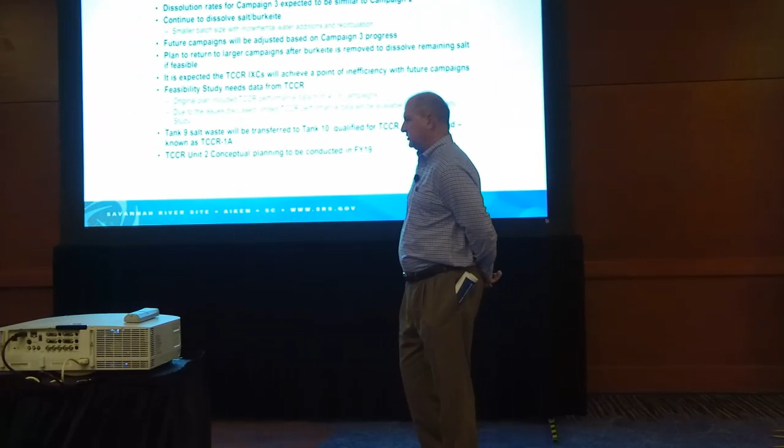Jeff and Penn, great presentation. Thank you. I have a couple of questions. Did you say the TCCR was initially set up and assembled at Hanford? It was set up and assembled by our contractor, Veolia Nuclear Solutions, at their location in Richland, Washington. So it was not at Hanford, but it was in the same location. No relationship other than close proximity. Is there any reason why it could not have been assembled here in Savannah River on this site?

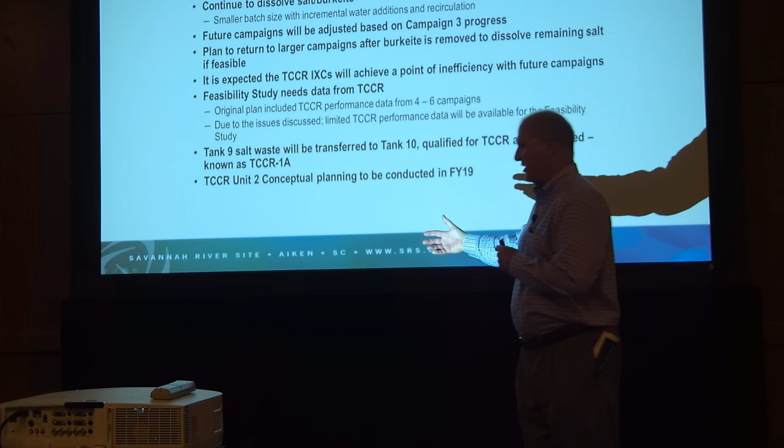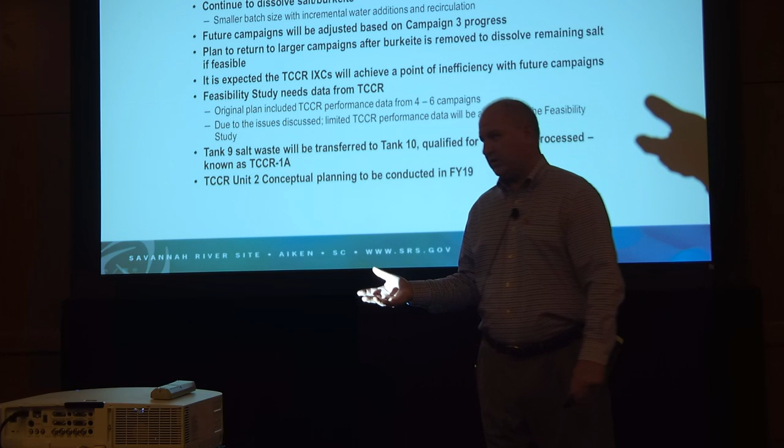We bought the expertise for this. So we bought the engineering, we bought the fabrication. We don't so much do specific engineered type fabrications. We will buy the engineering and we go to an off-site vendor to buy the actual engineered components. Typically what we do for most of our engineered components, pumps, we go to a pump vendor to buy pumps. VFDs, we go to a VFD vendor to buy VFDs.

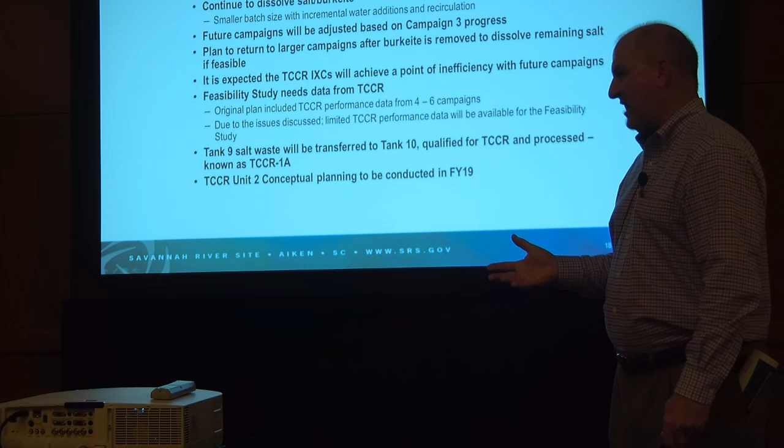So any of the machines that we can go buy from experts in the field, we will do that. We will do the installation, the hookups, and the utility work generally. So generally that's how we do things on site. If we were to fabricate ion exchange columns, we would not be cost competitive.

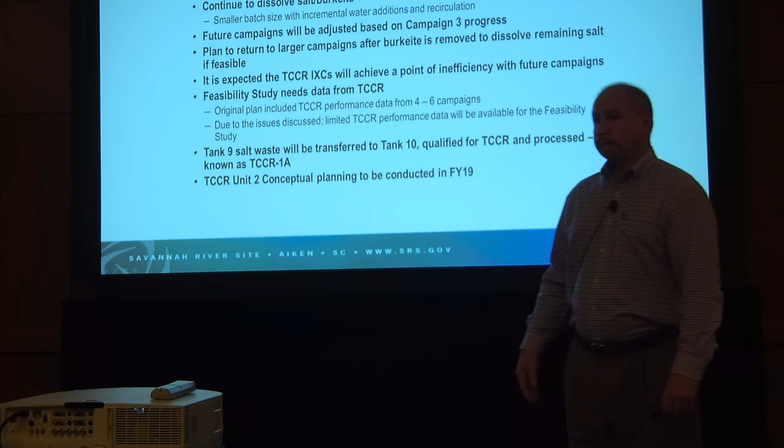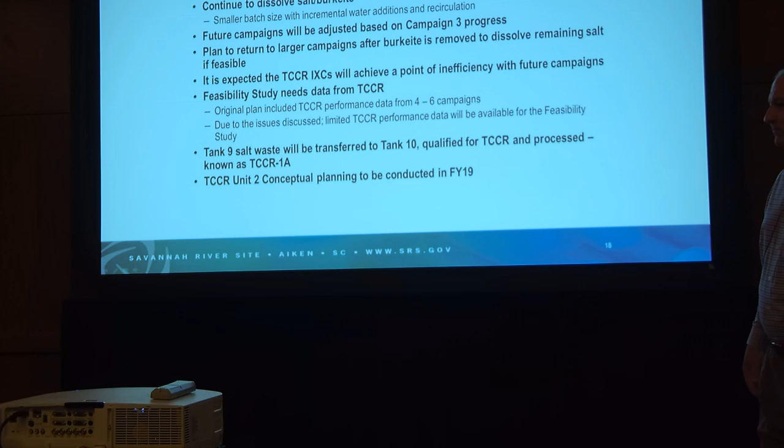Do you foresee having to use more than two TCCRs in the future? Because you said you're going to go to a second TCCR, correct? We are going to a second TCCR, correct. At this point, no. What do you think, Jim? Nope. Okay.

And then on slide 4, you had down that the supplement salt waste treatment and accelerate waste removal from old style tanks. Is a TCCR just used on the old style tanks, or can it be used also on the newer style? Yeah, there's no restriction on the type of tank. It's just we're trying to get it out of the old style tank. Okay. Correct. And then how many operators are required for the TCCR to be put in use?

TCCR is an unmanned operation. So under general operations, we do not have a person assigned to TCCR. When we start it up, we have a person assigned, and then it's handled over rounds. We have alarms that go back to the control room. If we get an alarm, we dispatch an operator.

An operator will then determine what goes on. And of course, we have fail-safes. If there's leaks or anything like that, boom, there's a fail-safe, and the system automatically shuts down. So we have a qualified operator, at least one on every shift, but the system and the processes tend to be unmanned.

And the last question, the sodium problems that you had with the burkeite, you didn't have those same problems when they tested them there in Richland? No, the burkeite is not a TCCR issue. When the ion exchange and CST columns were being fabricated and the TCCR equipment was being fabricated, we didn't feed any type of burkeite through that. The burkeite is a product of what is in the tank at Savannah River Site. So no, we didn't test the TCCR equipment with burkeite.